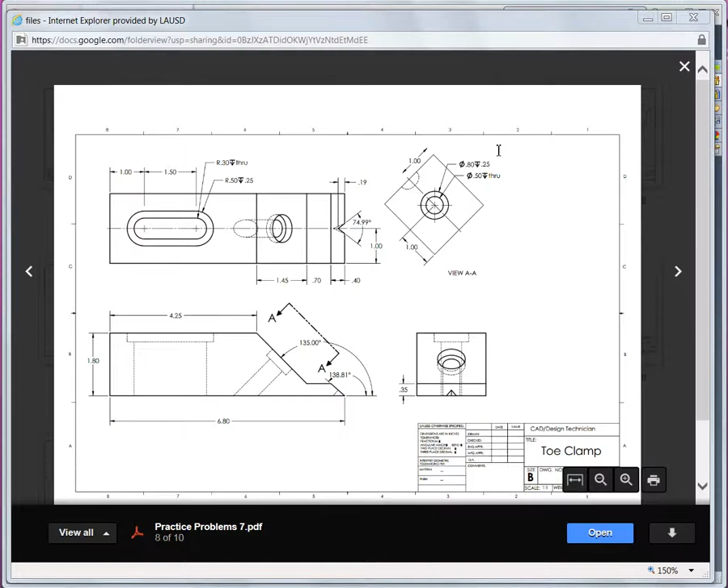Okay, with legacy options, what we could do is we could specify our own custom counterbore, right? All right, so I'll pull this off to the side. We'll start a new model. We'll go ahead and create a new part, and again this is using decimal inches, so if we just take a quick look at our formatting here, we're going to use the inch pound second units.

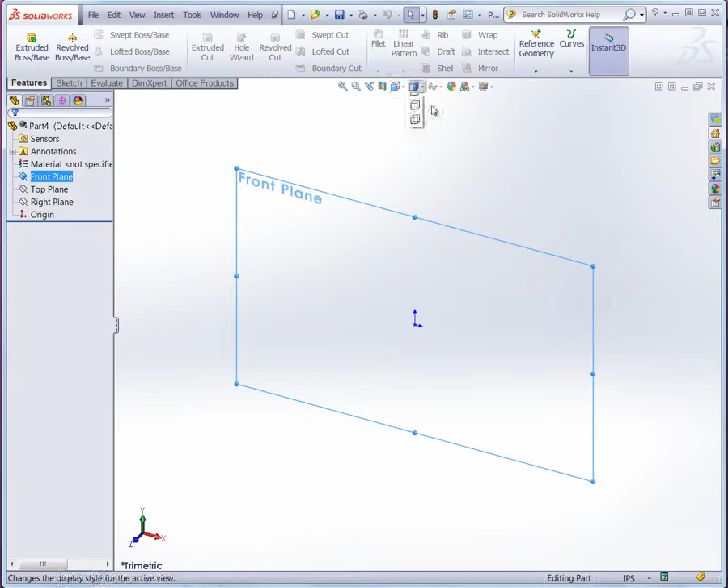So I said if we start with the front plane, right, again we want to make sure that our origin is turned on, and at this point I'll just make the bottom left hand corner of the base the origin, make that line up with the origin. Alright, so let's go ahead and get normal to that view.

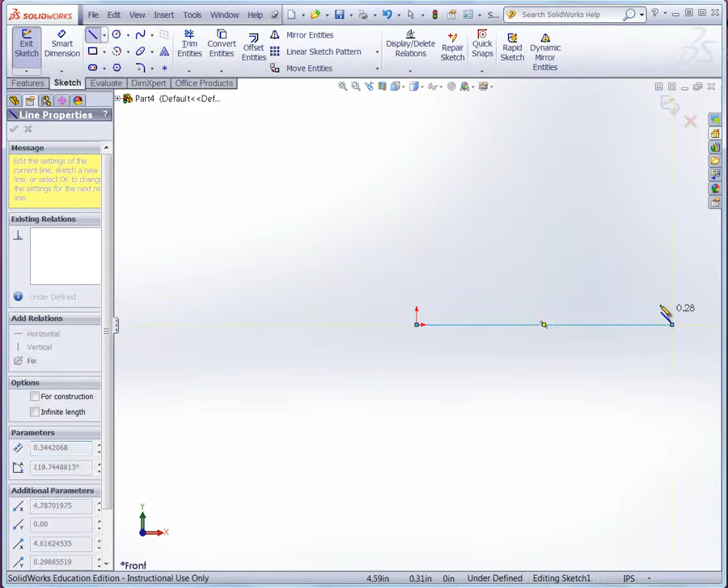Okay, and then we'll just start sketching. Let's go over here to sketch and use line, and what we've got here is we'll do our, let's do the bottom part here first, just roughly sketch it out. We got a little angle there, flat part there, and a different angled face here, the top part there, and then we come down for the corner.

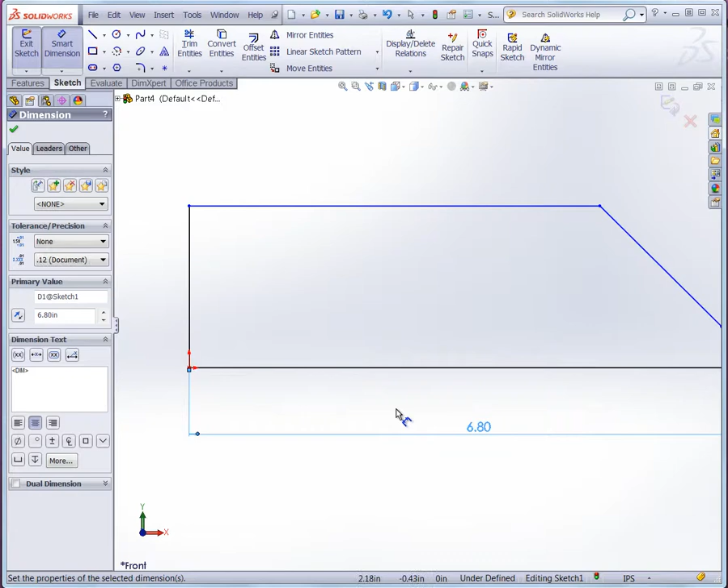Now again, I just sketched it out, but using the dimensions. Okay, we've got 6.80 here, and then we've got a total height of 1.80, and then here we can see in the right view we've got a height here to the base of 0.35.

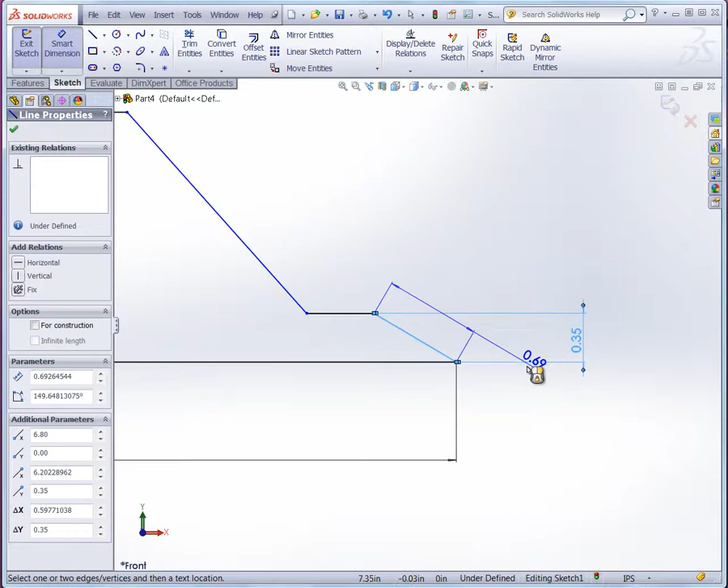Now we got 2 different angles, right? The first small angle here is 138.81. So if I touch the side here, you'll notice I don't have any other edge here, right, to calculate that angle. And if I touch the bottom edge here, you'll notice I either get 30, 35, but if I pull my dimension on this side, then you'll see the wider angle that I'm looking for, right? So if I place that like this and simply type in 138.81, okay, there's our angle.

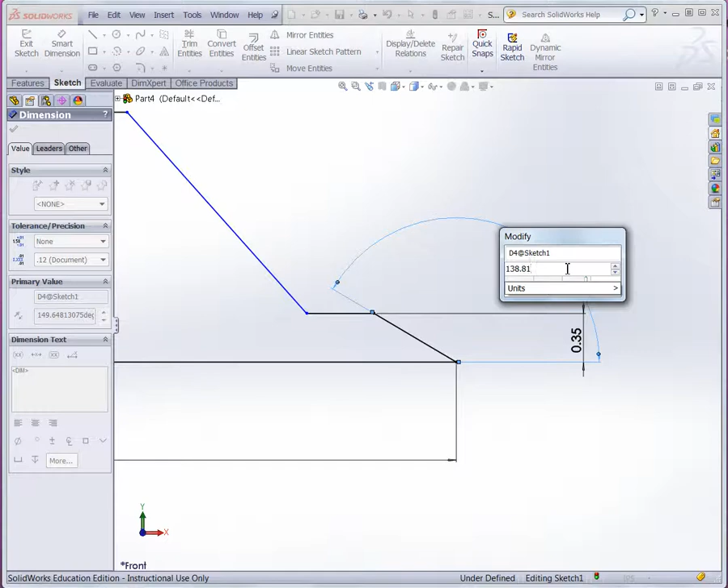Now the next angle is at 135, so I'll do the same thing. So touch the inclined plane there, and then the bottom, just adjust it to the right side there, 135. Okay, so it looks like we got most of the profile complete, right?

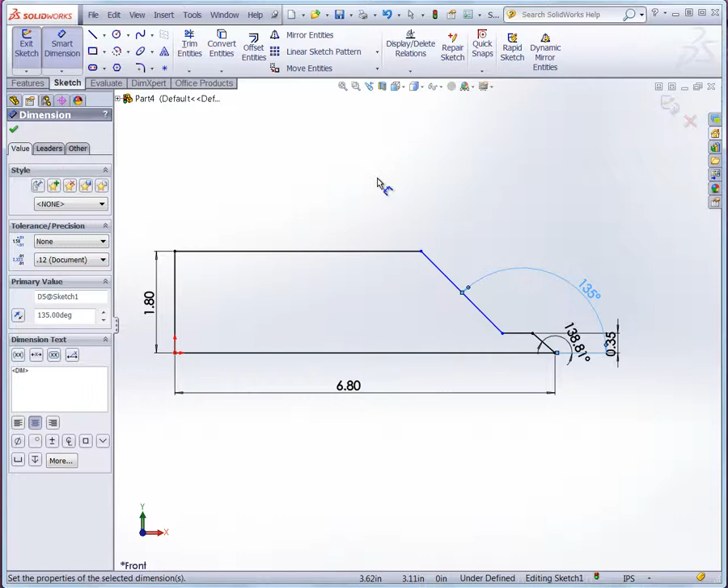Actually, if you take a look at the top sketch, you're also going to see some dimensions there, because we've got a distance from this corner to this corner of 0.4. We got a distance from here to this corner of 0.7, and then we also have the other distance of 1.45. So let's see if we can use these dimensions that way.

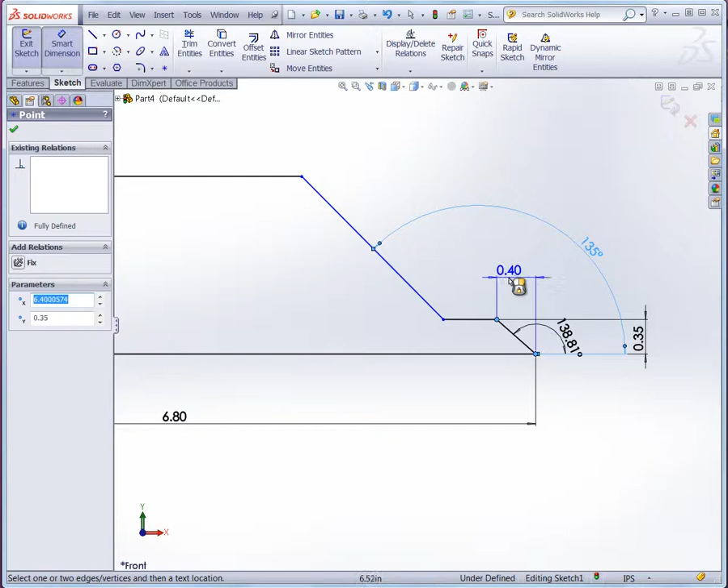So from here to there, I pull it straight up, because look, if I pull it off to the side, that's an aligned dimension. So keep it vertical or horizontal, and this one here should be the 0.4. Now you can see it already is. It's set that way. That's why I'm going to cancel this. And it's because I already have my dimension there and this dimension.

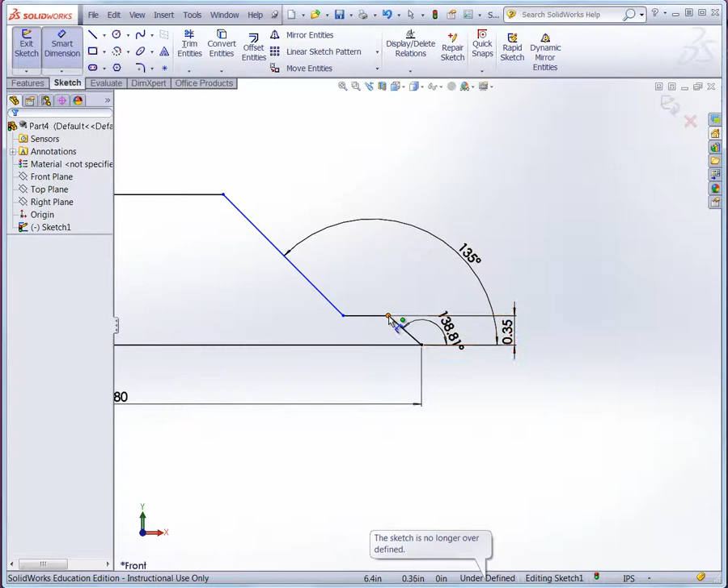Okay. Now the next one, and just to make sure it's the right dimension, it's going to be, what is that? 0.70. So let's check it from here to there, right? From here to here, we got 0.54. If I place it, I can change it to 0.70. All right? And you can see the angle still maintained, just pushes it further to the left.

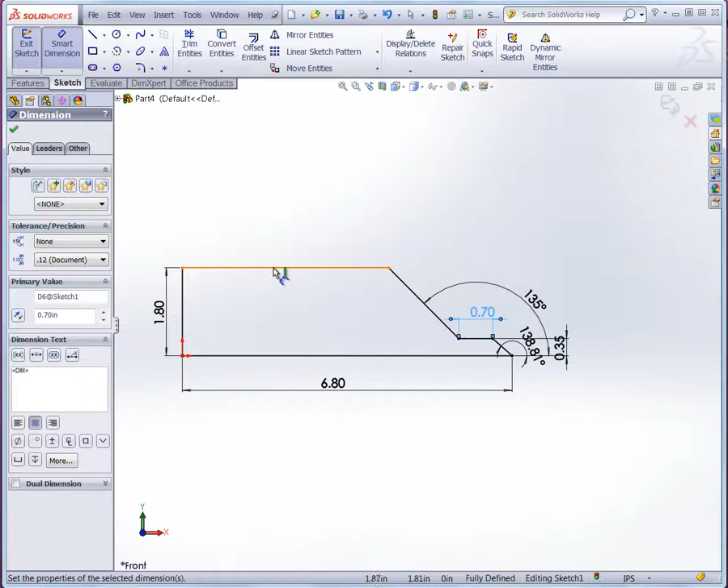All right. Now, we also have the length up here, which is a total of 4.25, right? So let's go ahead and set that. I think that's all we'll need to do. Now, you'll notice it's already been set too. There's a conflict here only because, look, I already have this dimension and I already put in this dimension here. Okay? So we can validate, and another way would be to use evaluate and measure. So if I just wanted to measure from one point to the other without having to use my dimensioning, I could confirm it that way as well.

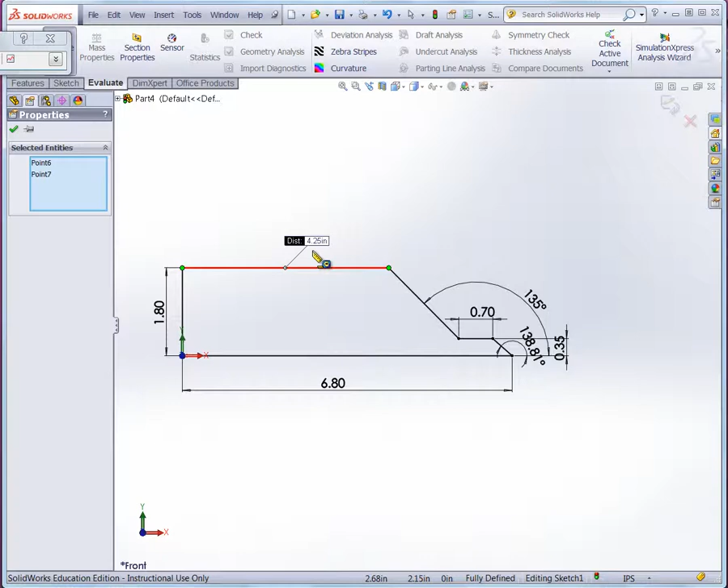All right, good. So we've got our base profile, and so now when I go to features, I'm going to use extrude boss base.

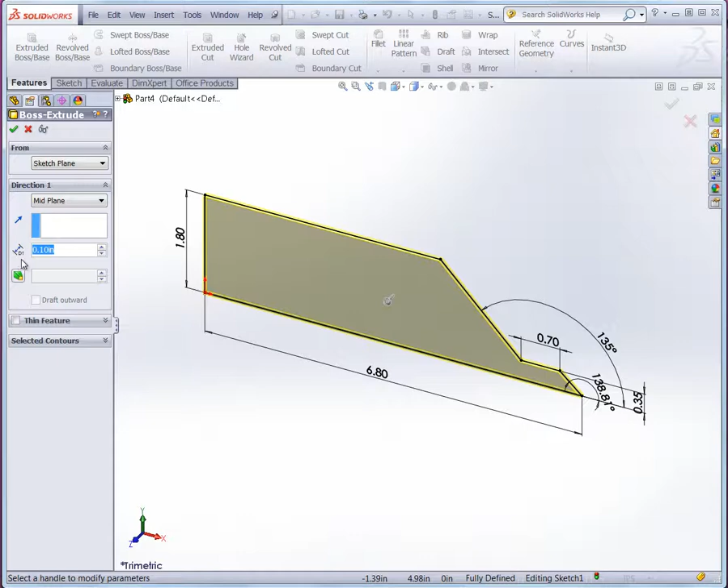Also, when I look at direction 1, I'm going to use midplane. The total width here is going to be 2. And that way you can see my front profile sketch perfectly bisects that whole extrude. If I click OK there, there's our base solid.

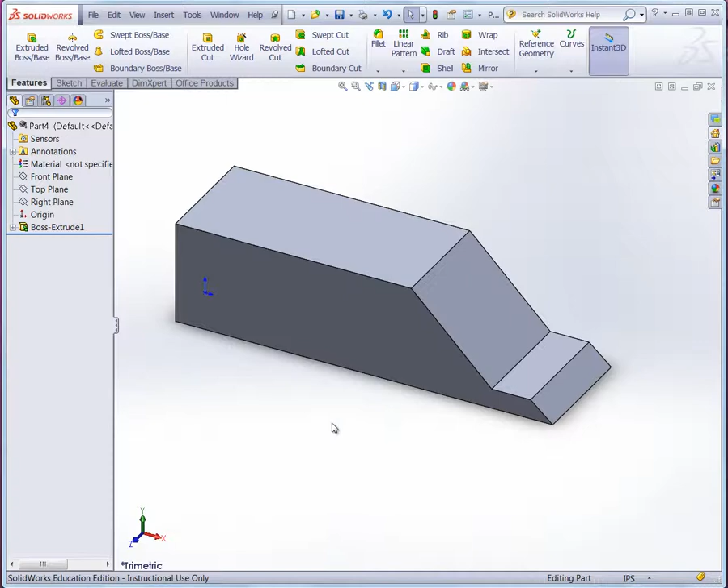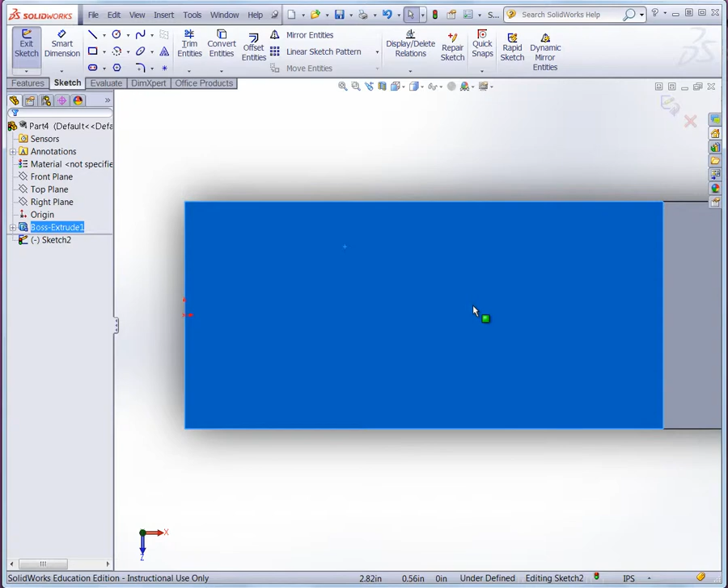So why don't we lay out the geometry to produce that? This is where we can use offset. It's a perfect example where we could use offset. So here, starting on this face, let's create a reference line. You can see here's the origin, so I'm just going to project something a little bit from the origin all the way across that face, making sure it's horizontal.

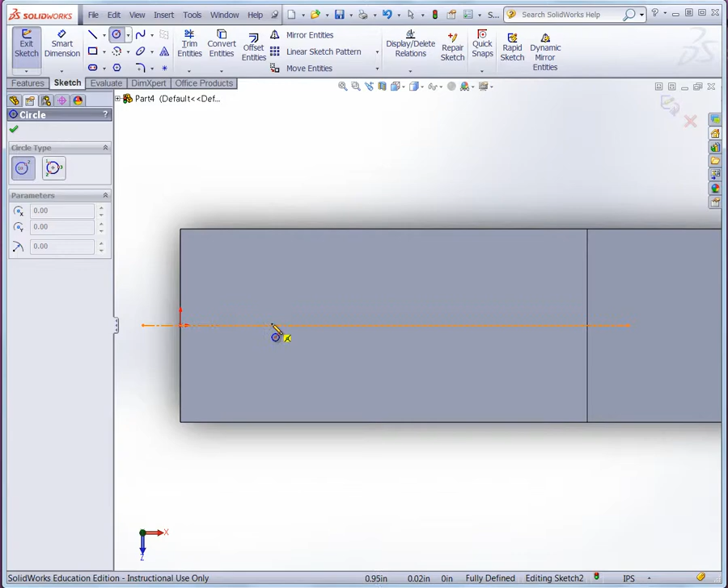Okay, and then we can start placing our circles. I'm going to do the larger ones first, which are 2 radii of 0.50. So we can do one here, and we'll do one here. Now notice, I made them slightly different size.

But here's what you want to do, here's what you could do with relations. If I select one object first and then use Control-click, now look at my properties. Now you can add relations here, and the relation is going to be equal. So if I change one, it changes the other too.

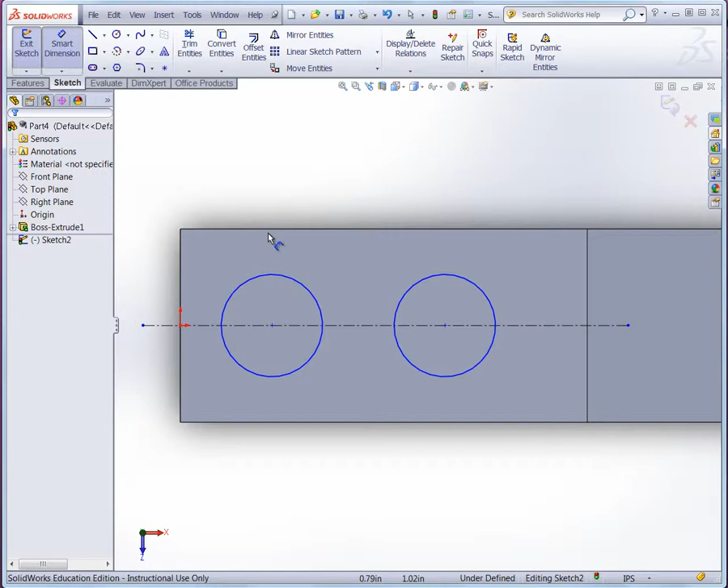Now using Smart Dimension, I'm going to set that to 0.5. Notice, right now, if I just place the dimension, you can see it's in diameter, right? Obviously I could do the calculation, but if you wanted to use these dimensions in your drawing too, then you might want to change it. So first, select the dimension, right-click, and use Display as Radius. Now you can see it as a radius, double-click, and then just put in the radius of 0.5.

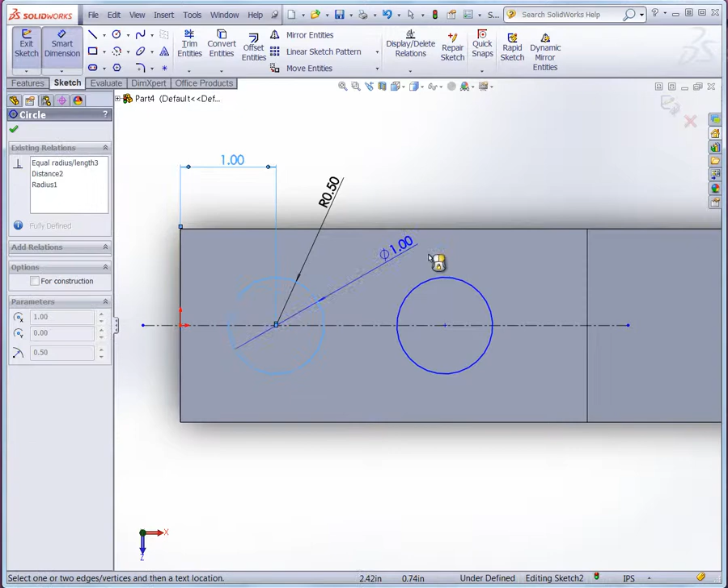Also, we need the positioning. So from this edge to the center, we've got 1. And then between the two, I select the edge of the circle here, select this circle edge, place the dimension, and that should be 1.50.

Now, we need 2 tangent lines that are horizontal. Here's what we could do. If I just create the tangent line that's horizontal, it's a little bit bigger too than expected.

What I want to do is create a relation between this line and the 2 circles, and then I could just make a mirror. So how do I do that? First Control-click, control-click the line, so the circle and the line, create that tangency first. Now I can assume, because the line is horizontal and this is the exact same dimension and it's collinear, that it's also tangent to that circle, so we don't need to do anything else.

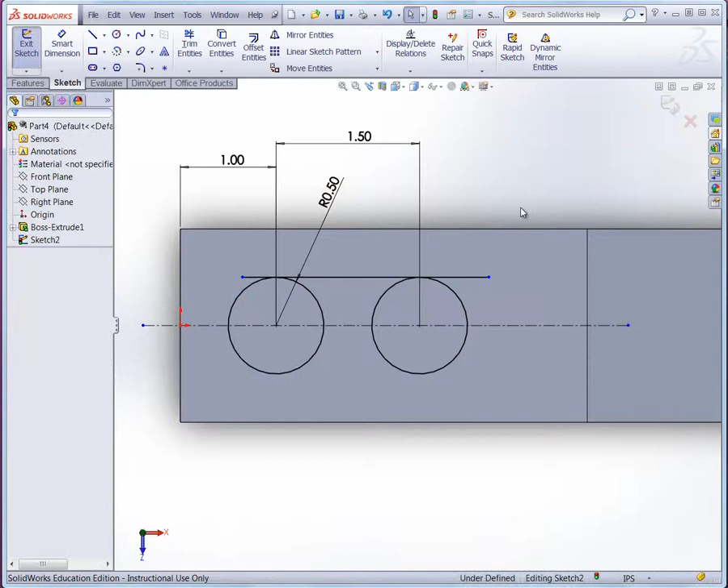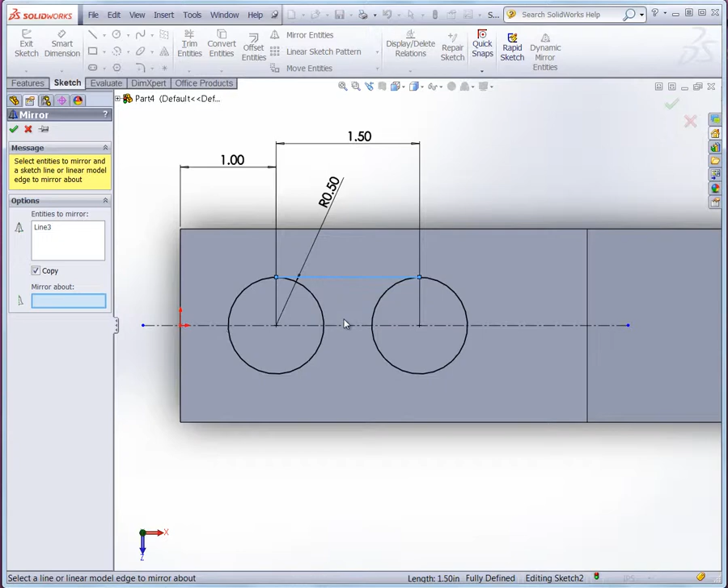But before I mirror it, I'm going to trim it here and here. Now to mirror it, I'm going to use mirror entities. The entities to mirror will be the line, and the axis would be this center axis right here. Now we can trim the circles.

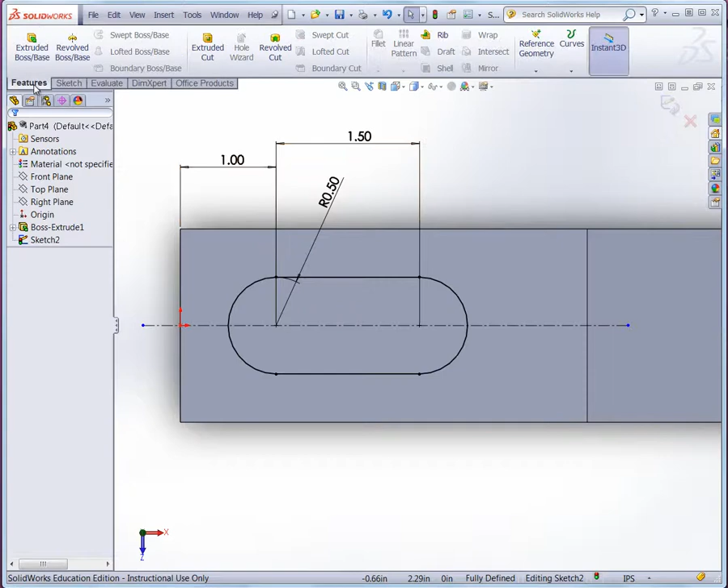Now, this is the profile to create that cut extrude, depth to 0.25. But we've got another profile, and that one's going to go all the way through. So I would suggest that that should be a different feature. So with this profile only, I'm going to switch to features and use cut extrude, and here I'm only going to go down to 0.25.

If I look at it from the side, you can see how it's going into the model. And when I click OK, there's the cut extrude. All right, so now you can see that the inner profile is offset by how much?

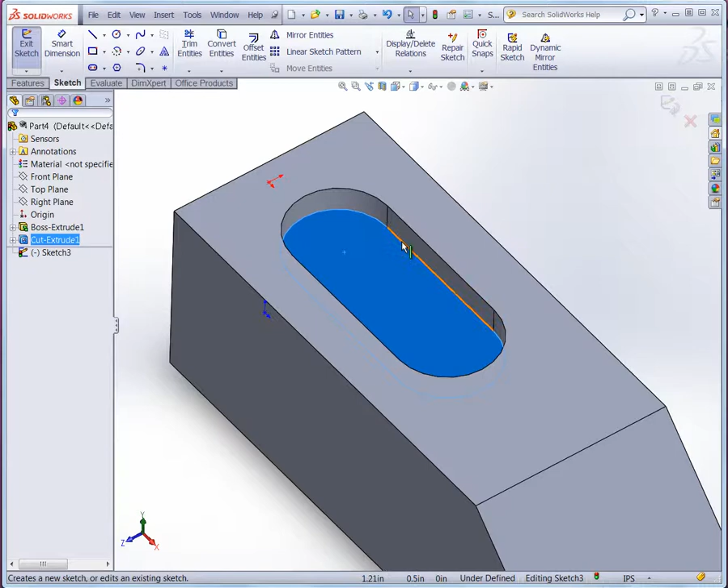0.20, right, 0.20. So again, it's going to be on this face right here. Select the face, create a sketch, select the entire chain. Now, how can I do an entire chain? If I select one edge here, I can right-click, and I should be able to select the entire chain. Actually, it's probably even simpler than that - you'll see here's select loop, and there's the loop that's selected.

But you'll notice also that if you just start the offset command, it'll automatically assume a loop. Let me show you, I'm going to deselect that for a second. I'm already in the new sketch here, but I'll start with offset, and you'll notice here we've got the dimension. I'll set it to 0.20. Notice when I come here to the edge, it only does that edge, but if I select, right-click, and select loop, there I can use offset that way and create the entire loop.

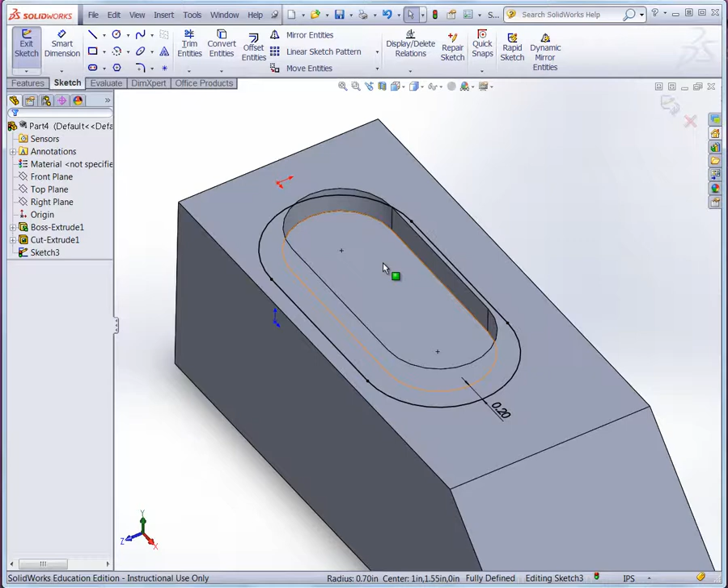But now I think I have a double. Let me get rid of one of those. There we go, so offsetting, and that's not to the right side, right? Can I fix that? Is it possible? If you look here, here's the dimension. And I think I've already completed the command, so let's just redo it here. Let me undo that.

All right, let me go back. Let's start with offset. We already have the value there, 0.20. Before I click OK, I want to make sure I can reverse it. If I select one edge, right click, I should be able to select loop. Oops, wrong side, my bad. Select loop. Oh, I got out of the command one more time. Let me try this again, I'll cut this out, don't worry.

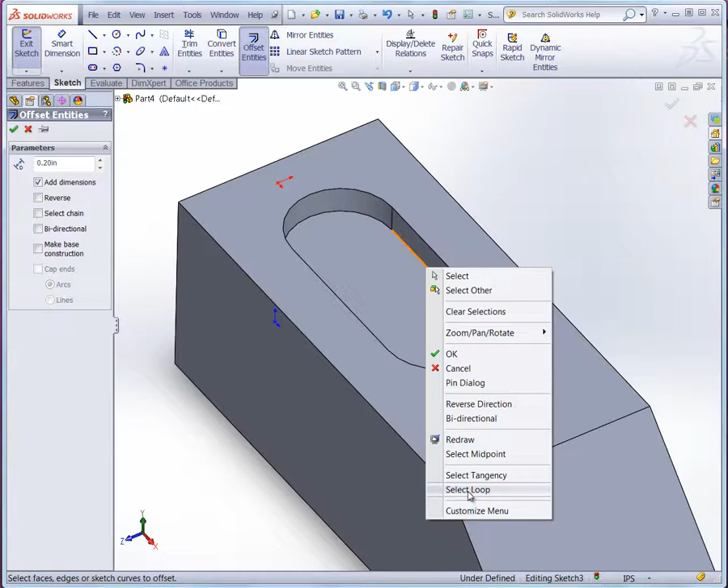Alright, here we go. We're going to use offset, 0.20 is our value. When I come here, this is what's tricky, because what I want to do is right click first and see, do you see loop? There's loop. I'm right over the edge, right? You can see how the edge, not the face, but the edge is selected. When I do that, now you can see the whole thing, right? And then here I can reverse it, that's what I want to do. Once you verify that it's on the right side, it's the right dimension, then go ahead and click OK.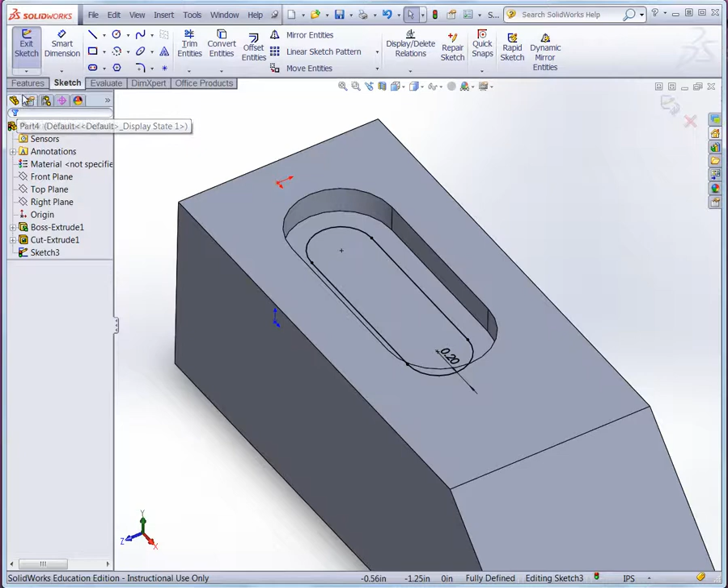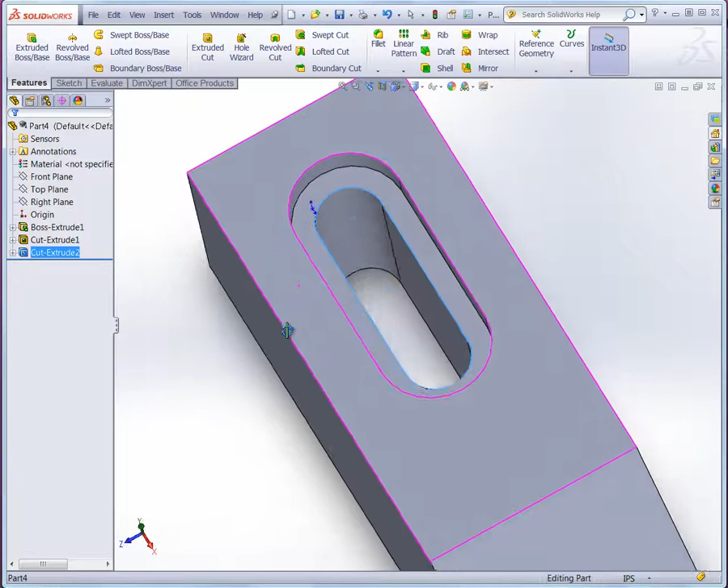Now, we did this so that we could go back to feature and go to Extrude Cut, and this time, here's what we could do. We could do up to next, which is the bottom, or if we did through all, we would be cutting through everything below that plane. So you got to be careful when you make those selections. I'm just going to use up to next, and then click OK. And we could see here as we orbit, we're cutting all the way through. All right, so there's that feature.

Now we still got a couple more features, okay? Let's take a look at the counterbore, which is on this face right here. Now we have the auxiliary view to indicate its position and the dimensions of the counterbore. If we take a look at our features tab here, you'll see the Hole Wizard.

And what we want to do with the Hole Wizard here is we want to take a look at, let's pull this design tree out a little bit more. You're going to see here's the hole types. If you look here at the bottom right hand corner, this is the legacy hole. The legacy hole is the one you want because that's what we'll use to customize our profile. The type is the counterbore. There's the profile. Down below is where you're going to see the parameters.

Now you can look right now, if you're not familiar with the features of the counterbore, you can see here 0.79, that refers to the depth, the counterbore depth. And then you'll see up here the larger 1.57 diameter, that's the counterbore diameter. And then the smaller diameter, the 0.79, is just the diameter that represents the hole through.

Okay, so if we take a look at our sketch, we've got 0.80 as the counterbore diameter, right? So if I go there, highlight that box, that's 0.80. The counterbore depth there is 0.25. And the hole through there is going to be 0.5. Again, be careful because it's diameter, not radius, right?

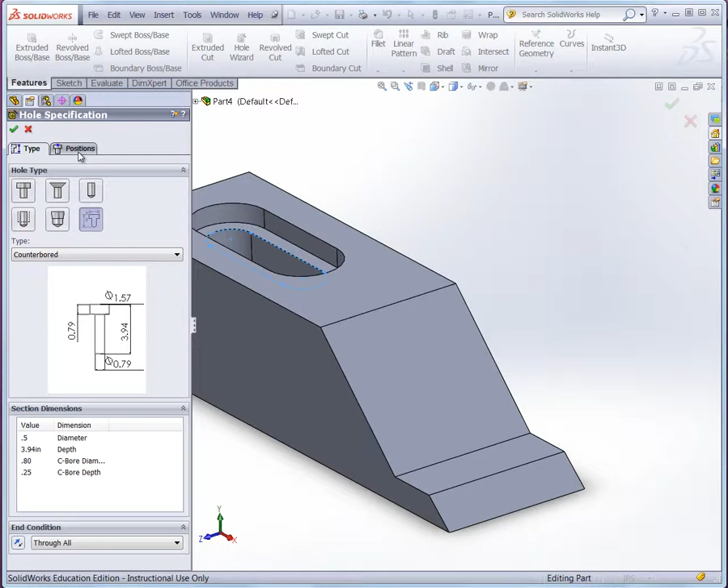Now, the second thing you need to do is if you go to the top here of the properties, you'll see we're in type. Now I'm going to go over here to position, right? In position, when I select the face, this is where I'm going to place it. So if I place it just anywhere, I'm just going to place it right there, right?

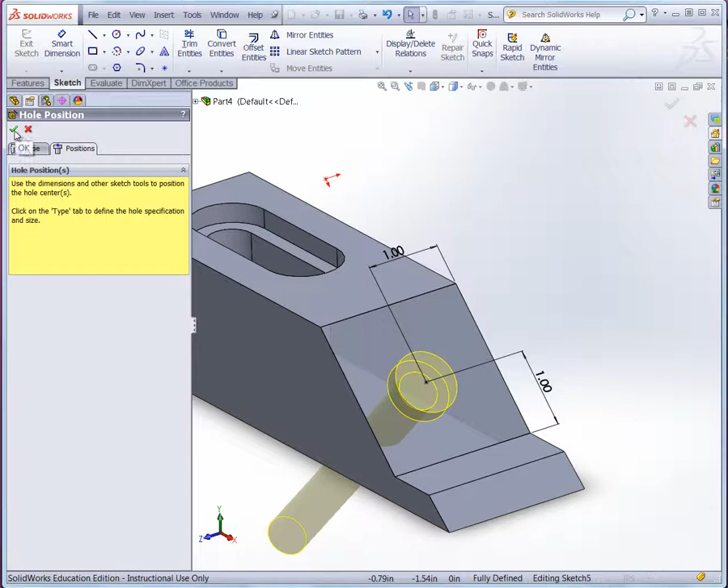There's the hole. Just going to place it anywhere, and in order to use the dimensioning, I'm going to use right-click and select. Now I can use Smart Dimension. If you escape, you cancel the entire command, don't do that. Use right-click and select, Smart Dimension, snap to the point, right? Snap to the point from here to the edge, that should be 1. And then again, snap from the top face, or the bottom face rather, to the center point, and that should be 1. And that's how you're going to position it. Click OK, and you're done with the counterbore feature.

Actually, if we go into the front view and we change our display style to show hidden lines, that's what you see right there, right? You can confirm the way it appears. The last feature we have here is the notch. Now this is a little bit difficult because we don't have true dimension. All we have are dimensions related to the top view, right? So let's go to the top view here.

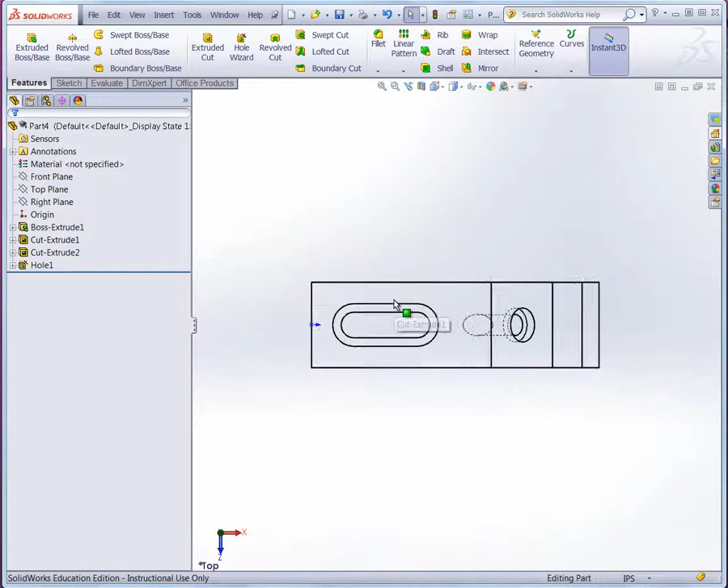We'll be able to use the top plane, which is at the bottom of the part, to create the profile that we see dimensioned in the top view. But we want this cut extrude to go at an angle. We need that to go at an angle.

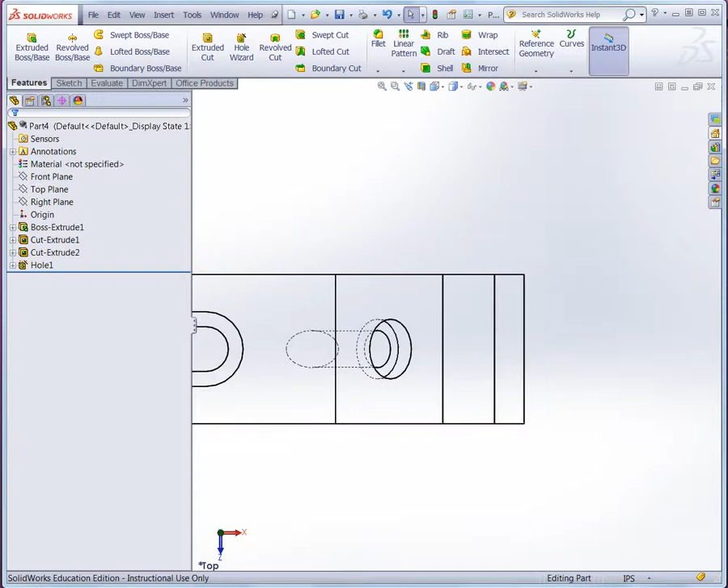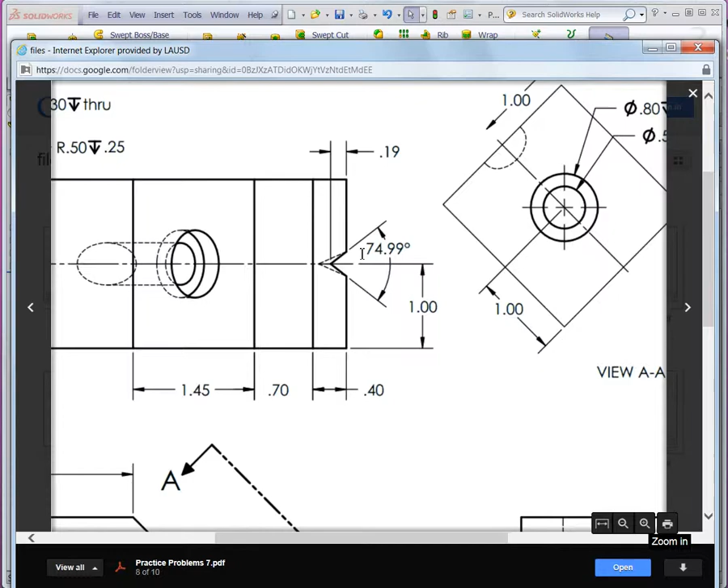Now we're going to take a look at the last feature here, the notch in the bottom front part of our base extrusion. We only have these dimensions to establish the angle of this profile from the top view. So I suggest creating a plane parallel with this edge so that in that sketch we can create the proper profile, which can then be projected onto this face to give us the correct orientation for the cut extrude.

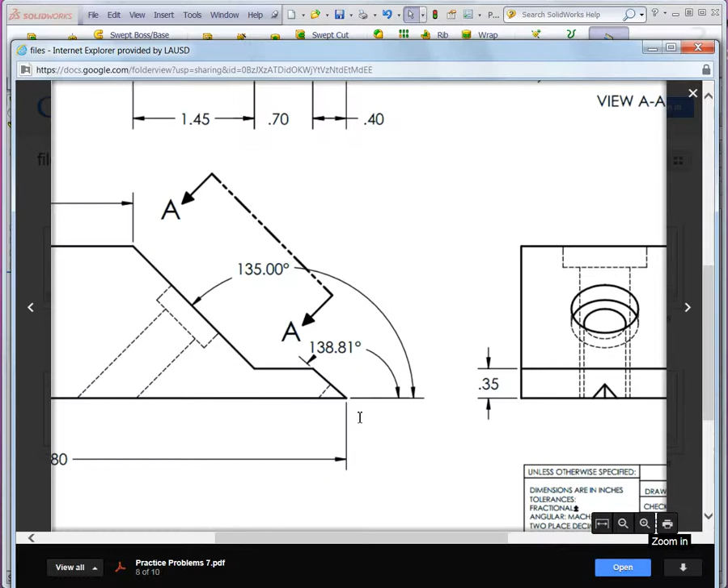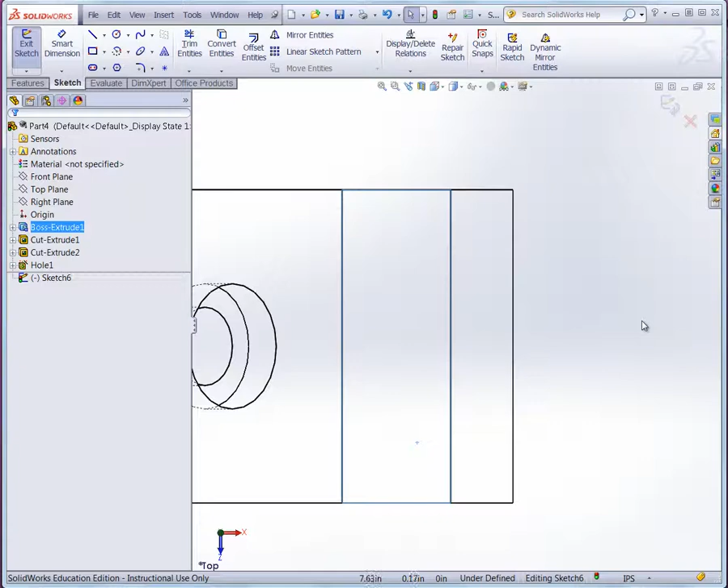With that understanding, let's go back to our model. I'm going to use this face to create a new sketch. Now I'll switch back to top view. I need to see the origin so I can establish a center line.

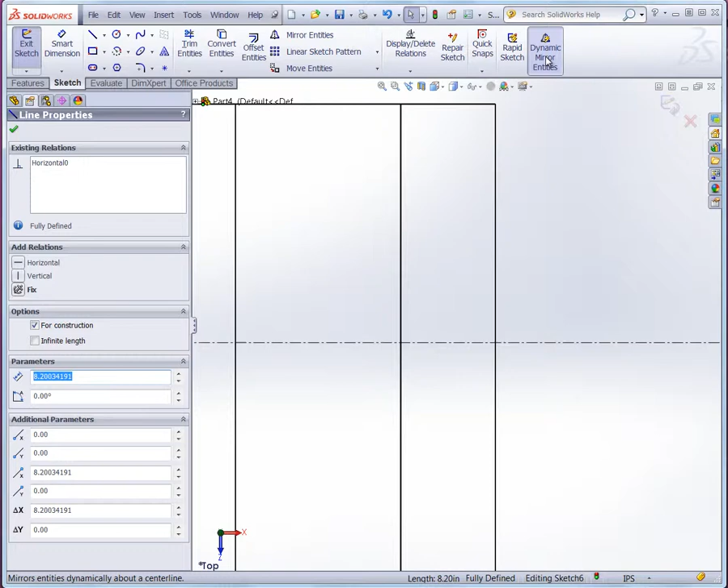Zoom in again, and it's roughly in this area where I'm going to create that profile. You'll see that if I use the dynamic mirror, I'll select the axis and dynamic mirror, and start right on the edge to create my profile just like that.

Now I'll use smart dimension, and all I need to do is dimension half of it. So I'll do it like this: 75 divided by 2. And there's my angle. Also, the position from this edge to the corner is going to be 0.19.

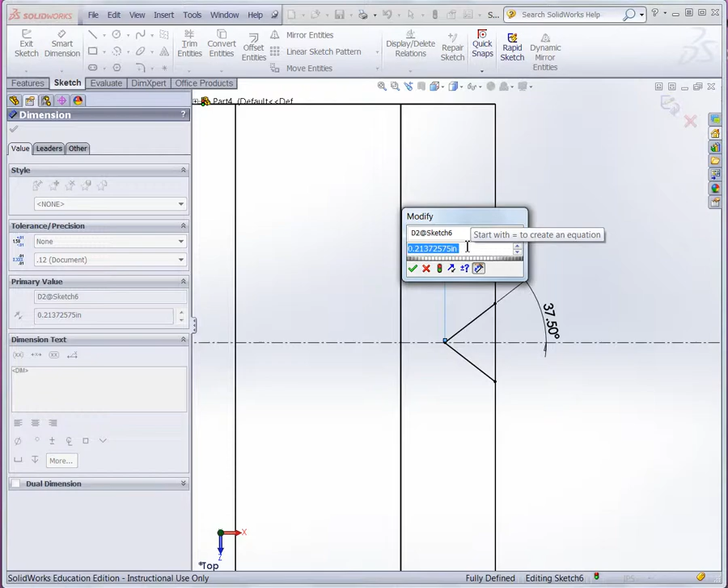Now that's the profile, but it's not going to do anything for me to produce the actual cut, as you can see there. But here's what I'm going to do with this. That's one sketch - that's like a reference sketch, okay?

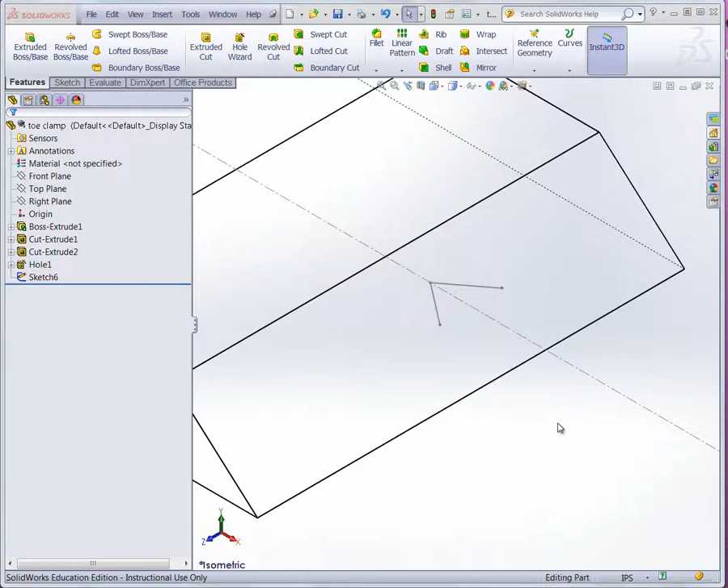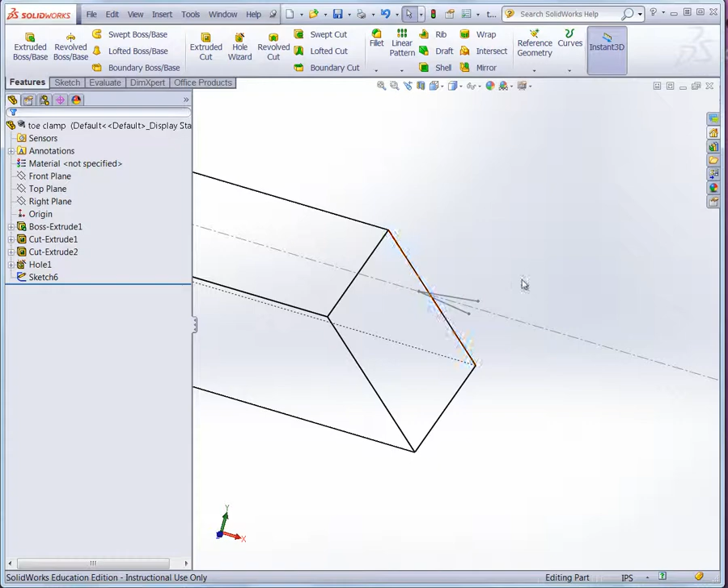Now that I have this sketch in this plane, I want to project this sketch. Originally, if I was going to use convert entities, it would project these sketch entities from a plane parallel to the plane I want to project onto. What I want to do instead is project these lines straight down onto this face.

I'll be able to do that and then use the projected lines to create yet another sketch that I will then use to cut extrude.

So if we take a look at curves, and look here at projected curve, what I'm able to do is first sketch on faces. The sketch that I'll be projecting is this sketch right here, these two lines and the construction line. And the face I'm going to be projecting to would be this angled face. I want to reverse the direction.

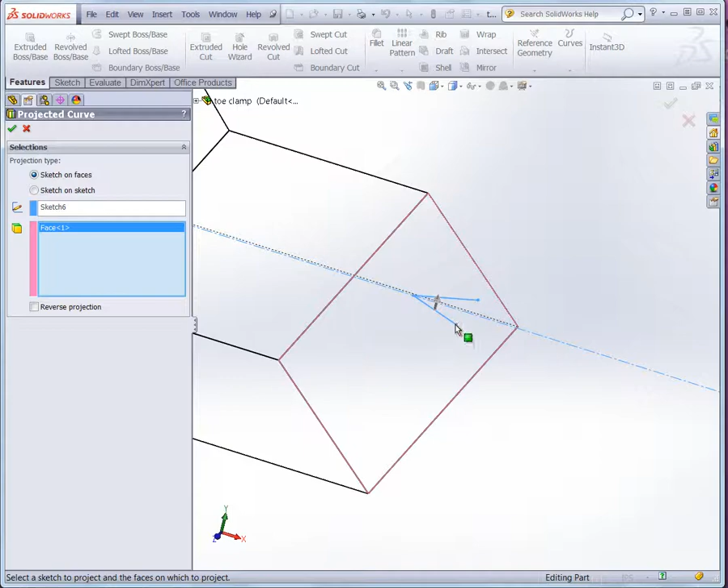Now you can see there's the projected sketch lines. When I click OK here, there's my sketch lines. You can see in the design tree, it is really a feature, and it consumed sketch 6.

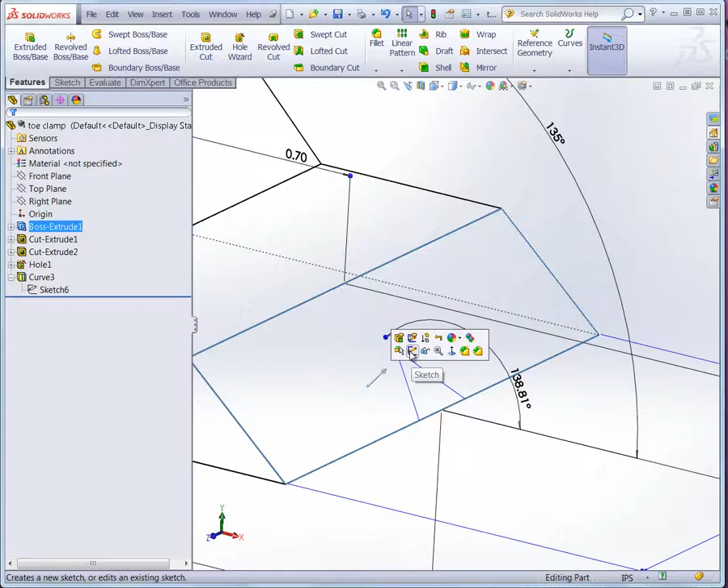So what I'd like to do now is simply use the face to create yet another sketch, and using these projected curves, I'll be able to convert these two entities onto this new sketch.

So I'll use convert entities. I'll select the entities. Let's go back again. And there's converted entities - you can see there's the sketch.

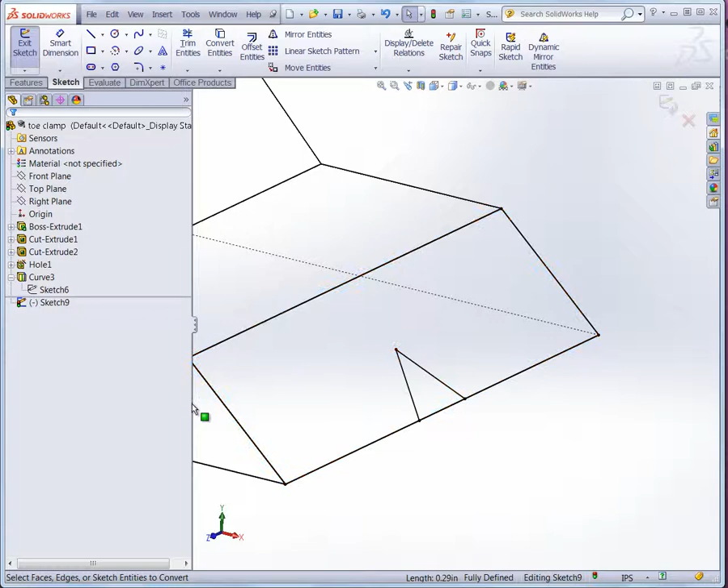Now what we'll be able to do is use our features and Extrude Cut. You'll be able to see it as we go around the back to the bottom side there. We can use the contour - select the contour first. We'll come back again here.

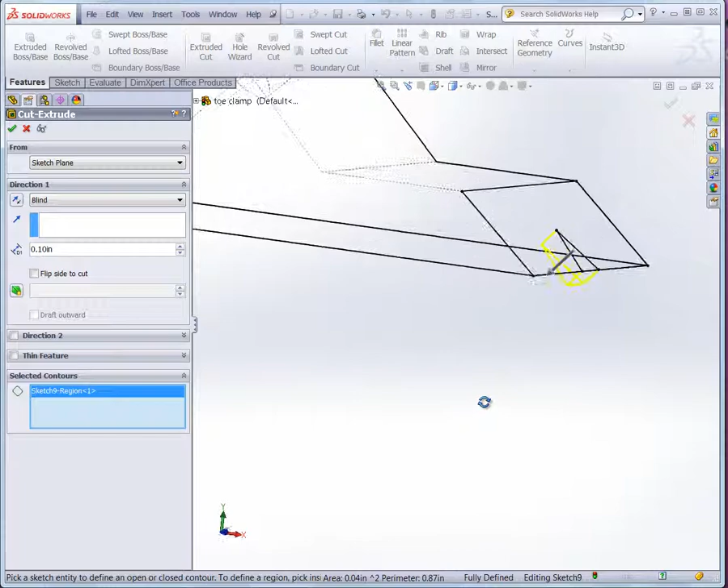You can see right now it goes blindly to a certain depth. If I use up to next, it's only going up to the bottom of the face there, as you can see, so that's not going to be a good option.

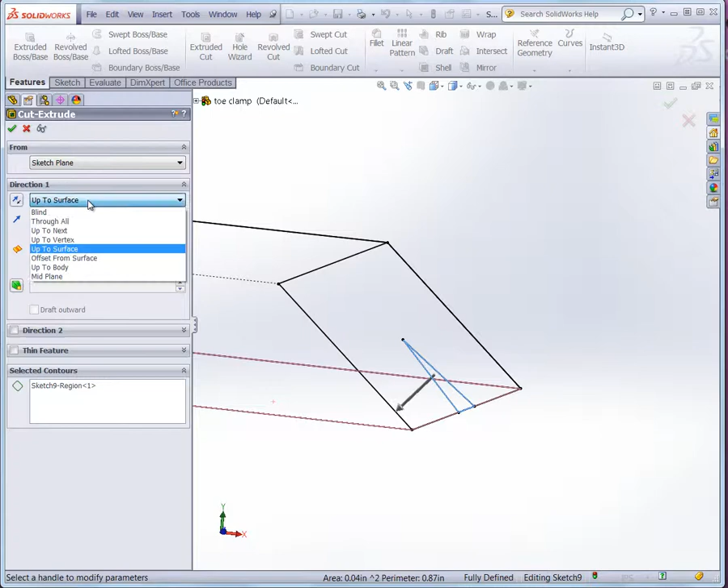If I use up to surface and select the bottom surface, we don't see the preview quite well, but I can use through all, and I'll make it go through the entire base there. When I click OK, now we should see the correct projected profile as a cut extrude.

If I switch back to the front view, now you'll be able to see the correct profile there as well. Alright, so that's part one.

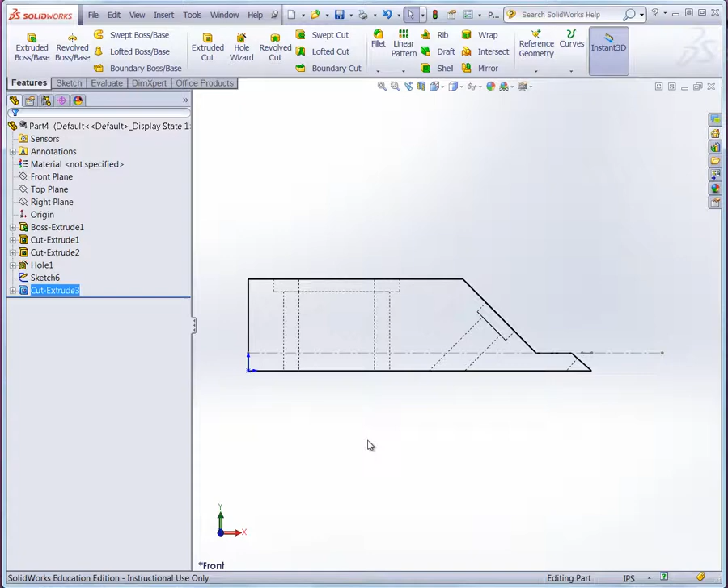Let's take a look now at presenting this drawing with the standard three views.